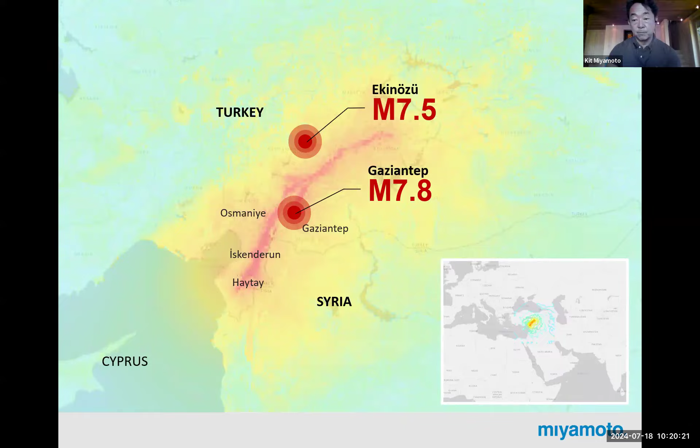If something like magnitude 7.8 and 7.5 happened here, we're going to have some serious consequences. The impact affected almost 14 million people. It's such a wide area and high density, and it killed 51,000 people and injured 100,000 people immediately.

It displaced almost 4 million people, and it's about 3 million people to this day, even after 1 year, affecting almost 10% of the gross domestic product. So it's a huge impact here.

This is probably one of the worst earthquakes I've seen for quite a while, maybe since the Sichuan earthquake. Magnitude matters, especially the 7.8 and 7.5 back to back, 2 hours apart, and early morning - that was a huge impact.

Using NASA JPL data, we assessed about 1.7 million buildings. Most are apartment buildings, usually 3 to 6, 7, 8 story high concrete structures, built maybe 20-30 years ago. It's a fairly modern area, but expanding a lot in the last several years too.

Out of the 1.7 million buildings, about 2%, 35,000 buildings collapsed immediately. And 200,000 buildings, about 10%, were damaged really bad, near collapsing. Almost 500,000 buildings, 28%, received light to moderate damages. So you're looking at about 40% of building stock that was not occupiable.

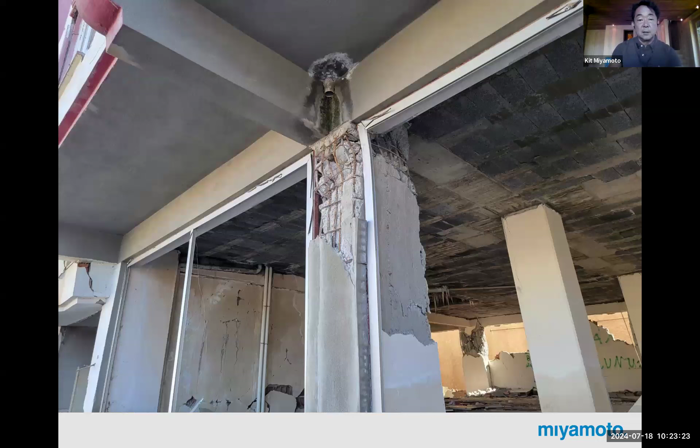Something like this - this is what engineers call the plastic hinge formation. Believe it or not, this is in a textbook. This is how it should work, you know what I mean?

We push the buildings - earthquake pushes the buildings almost to the verge of collapse, but not quite collapsed yet. That's how California building code is set up, and how the world is engineered. This is one of the best case scenarios here, even though it looks bad and dangerous as it is. This building was not repairable, obviously.

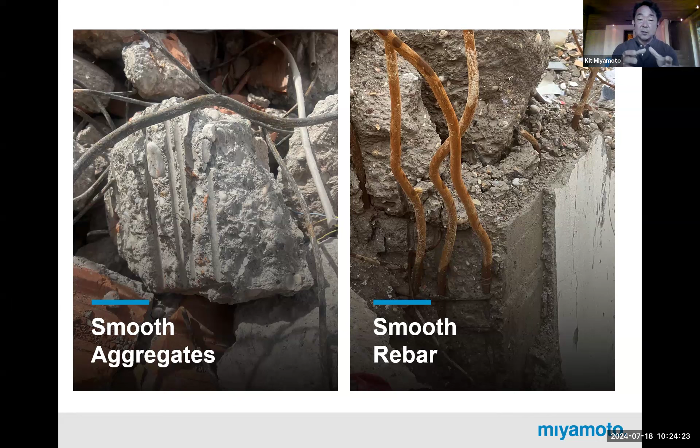But because there is no inspection system set up, there's a lot of irregular construction, such as the aggregate put in concrete being smooth, or smooth rebar, or not enough reinforcement. In earthquake engineering, the little tiny things matter - it's not like missing columns or walls, it's just little variations in fieldwork that make a huge difference, life or death.

Tens of thousands of apartment buildings have actually been reinforced today, which is really good. But we still have a ton of older concrete structures which haven't been addressed at all.

So Turkey obviously has had a huge impact, but at the same time there are success stories. For example, in Turkey, any hospital with new construction over 100 beds has to have base isolation.

What does base isolation mean? A building essentially sits on the ground - if the ground moves, buildings basically move with it, and that causes the damage. Base isolation provides a gap using what we call rubber isolators, or it could be air, but it's essentially a roller. So if the ground moves, the building stays in the same area.

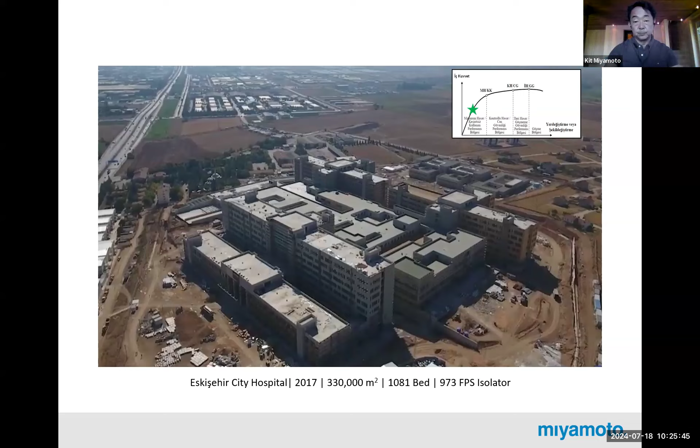That is actually something we should keep in mind, that hospitals need to be functional. Police, fire stations need to be functional. Without base isolation in this case, it's not possible. Because base isolation not only protects the building itself, but contents, which is actually much more vulnerable, much more important for many cases. So having a base isolation like this is the way to go, and that's how it's proved here.

In this regard, Turkey is much more advanced than we are, because we don't make that kind of functionality requirement part of our code. We imply it, but we don't really enforce it in the sense that the Turkish do.

For damage assessment, OES and our Seismic Safety Commission have been working with NASA JPL for quite a long time for this real-time damage assessment. Essentially, the satellite images show you the before and after picture. You overlay the buildings so you can see the difference in movement, and you assign the damage to it. For example, this city called Hatay had huge damage here, about 40% damage. The dots indicate where the major displacement of a building happened, as that's what damage is. Working with them over the years, this map has become very accurate, and it's a really useful tool.

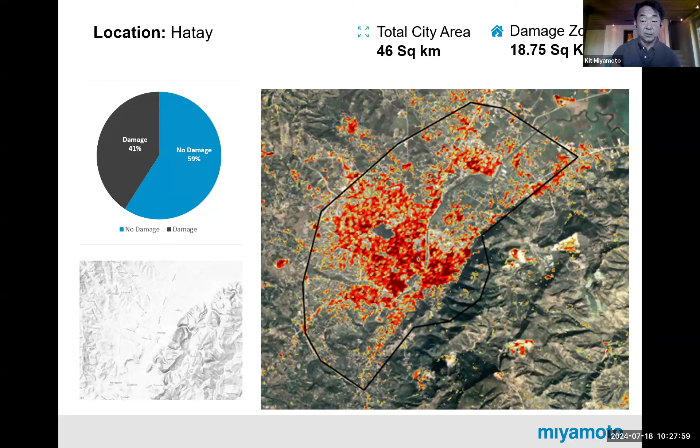So once things happen like that, our team deploys into the area, and we can go to places where we know the damages are. This is an incredible roadmap, and something we definitely need to use in California for future earthquakes, which is available.

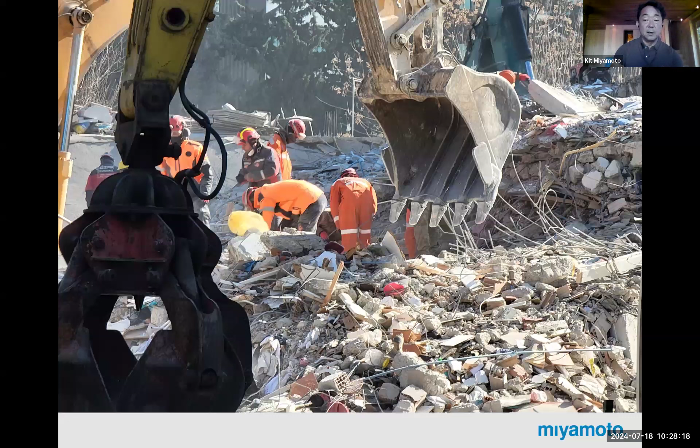Now, one thing the Turkish did right is response and recovery. Their reaction is super fast. I arrived there about 2 days after the earthquake, 48 hours. In every city and village I went, the commercial contractors were activated, by decree from the president, to get contractors to participate in urban search and rescue by removing debris and so on. So that's something you see everywhere.

In every village, every city I went, there were urban search and rescue teams deployed, not only the local Turkish ones, but international teams. There were over 100 teams deployed really fast. I think this is the first case where urban search and rescue teams were able to rescue hundreds of people, scores of them. It has a lot to do with the speed of response, that really matters, and also the quantity of it. There were 100 teams from internationally showing up really quickly. That really matters.

This team is from India, actually. And AFAD is equivalent to FEMA in Turkey.

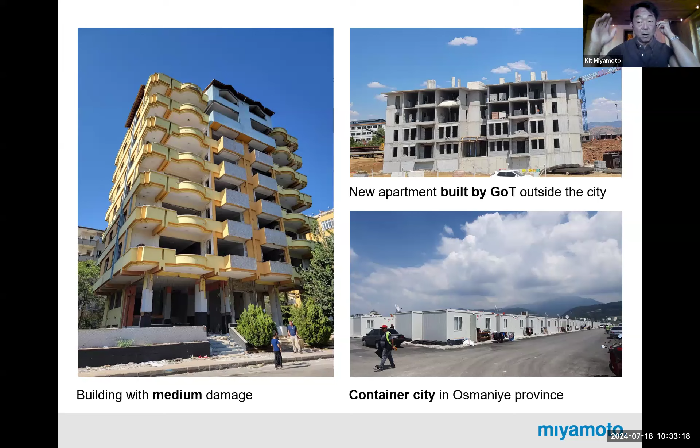So next phase, we're actually looking into moderate buildings to repair. By the way, it's really important to repair and strengthen the damaged buildings. I know the tendency is to want to take it down if there's some damage. The problem is once you take the building down, it's really hard to reconstruct back. That's something we saw in New Zealand.

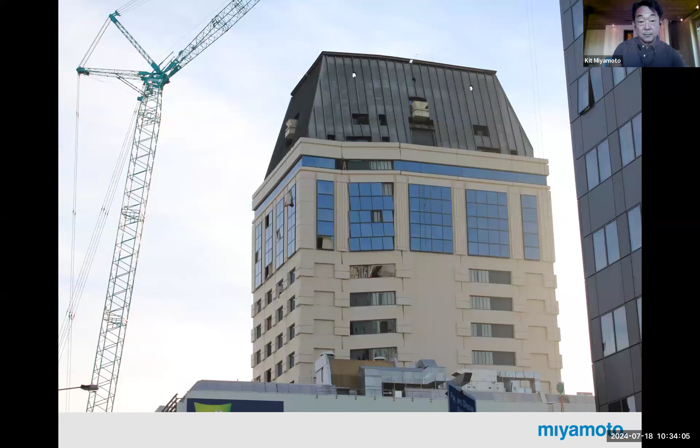Here's what happened - here's a picture. This is one of a high-rise buildings, a modern construction built in 1995. But you see a little kink on the left side. What happened is three columns just ruptured or failed at the 11th level. No one died - it provided life safety performance, we call it, just like we do in California. Everyone was able to evacuate. But once this happened, you cannot repair this kind of building. So it's a total loss. This is exactly what we're going to face in California.

Just no doubt about it in my mind. This is the first time you see modern construction, a modern city similar to California, went through that fairly moderate earthquake and had this result.

So what does resiliency mean anyway? Let's take a look, because we're looking at resiliency, right? So time is the horizontal axis, and a social indicator, such as in the New Zealand case, is the number of building types. Some earthquake happens, we lost 1,800 buildings, right? What we call direct loss. There's a downtime, which is the search and rescue or damage assessment phase - that's a downtime because there's no recovering effort happening.

Then the reconstruction side happens - the recovery component. So if the bucket is smaller, then that resilience is higher. So how do you do that? There are two ways to do it.

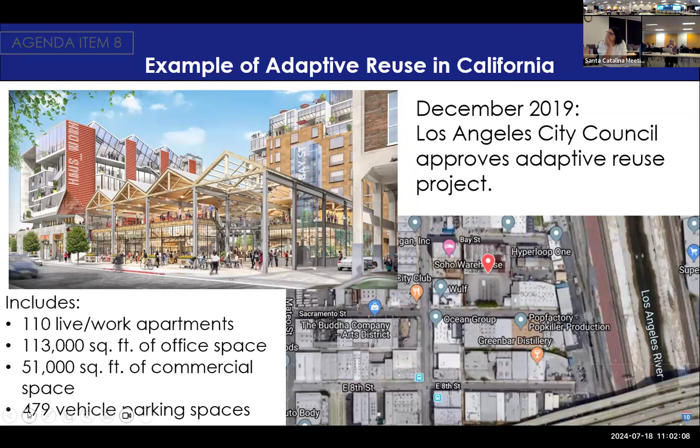Here's an example of an adaptive reuse in California. This one was done in 2019 and approved by LA's City Council. As you can see there, it will include some live/work apartments, as well as office space and commercial space and parking.

Next slide, please. The Mills Act was passed in 1972. It allows participating cities and counties to provide property tax relief for qualified historic properties. Local governments have to elect to participate in the program, but it provides homeowners or building owners a 40 to 60% annual tax savings for newly improved or purchased buildings. Those buildings have to be rehabilitated with seismic safety in mind, as well as affordable housing and promotion for them.

There are 2 bills in process right now looking to slightly amend the Mills Act, both assembly bills. One is AB 2909. It expands the offering of financial incentives to property owners for commercial buildings greater than 30 years old, and funds must be reinvested in retrofitting and repurposing existing buildings for new residential rental units. It's currently in the first chamber, and if passed, it would go until 2036.

Assembly Bill 2910 would allow LA to adopt alternative building regulations for converting commercial buildings and structures to residential use. They will need to work with the California Building Standards Commission and other state entities. It is also in the first chamber. If this bill is passed, it will go until 2029, or until a statewide adaptive reuse building standard is put in place.

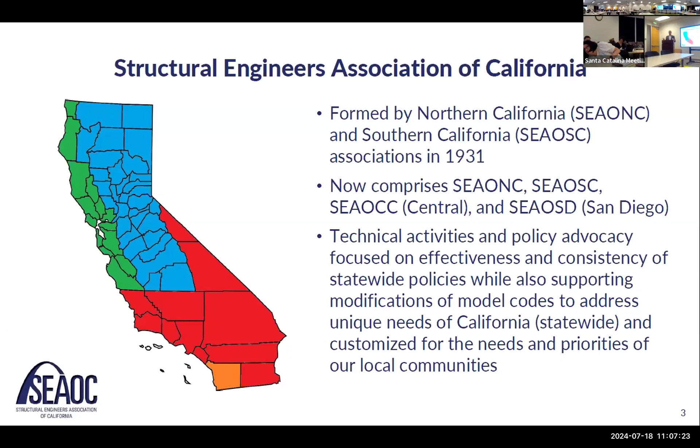Next slide, please. Like I said, we have been around for a while, almost coming up on our 100-year anniversary. We formed from both our Northern and Southern California regional associations originally, and then we expanded at the state level, adding our Central California and San Diego chapters as well. While we are a statewide organization, we also focus with Don Shinsky here in California's Capitol on policy actions at the Senate, the Assembly, the governor, and all of our state agencies. We also have strong local participation. City of LA and City of San Francisco have strong engagement from our local regions to help with local ordinances that supplement the things we're doing at the state level.

Andy, thanks for the intro. I had this here just in case. We do talk about adaptive reuse and some of the basics, but I want to make sure people understand adaptive reuse in terms of the building code context is already covered by the building codes. The existing building code talks about conversions, alterations, or changes of occupancy. So there are provisions in the California existing building code that would cover what we might consider today, adaptive reuse, more specifically, say commercial office to residential. We'll talk a little bit about the effectiveness of the California existing code provisions as it comes to existing building safety. Next slide, please.

So just as a reminder, you've heard me before present to you on things looking forward about what our codes could be doing. Kit was talking about things. You've all heard about functional recovery and how we could be doing new buildings better.

Any new building code initiatives, just to remind you, don't apply retroactively to existing buildings. That's probably well known amongst this group. But I just want to make sure we understand existing buildings don't necessarily trigger updates or upgrades unless certain things are changed within them. So in terms of the current code language, there are certain thresholds that must be exceeded before an existing building has to become compliant with some sort of new code requirement.

So those things you see here: changes in design load or altering a member capacity. Sometimes if there's a substantial amount of work being done throughout the building, but it's often a large percentage of the building being affected. And then also if for some reason a new configuration changes what we call irregularities, it changes the performance because it's not as regular anymore.

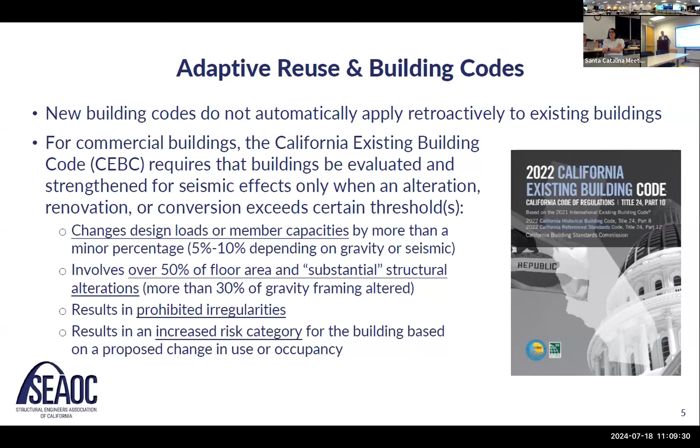Most buildings, and I'll talk about mostly commercial, regular occupancy type buildings, most buildings undergoing renovations or alterations don't usually exceed those thresholds that are in the current building code. That's why you see a lot of local ordinances looking at ways to be more proactive about how do we address performance of existing buildings, how do we get them to be more compliant with current thinking and current codes.

And so in particular for adaptive reuse, when you're thinking about commercial or residential risk category, we're not changing the risk category. Commercial buildings and residential buildings are the same risk category when we're talking about building codes. So that is not one of the thresholds that's going to be triggered to mandate some sort of change or upgrade in the seismic safety of the building.

And quite frankly, it's human nature that many people just naturally try to avoid the other thresholds, that they will plan around them to say, we'll just work in a quarter of the building so we don't exceed that 50% trigger, or we'll make sure that we're not cutting holes in critical walls, but we'll go do a lot of other work to other walls. So it's human nature that a lot of these thresholds don't require conversions at the existing buildings we see today to come up to speed or up to date with current codes.

So I will give credit to many forward-thinking state agencies, DSA, HCAI-OSHPD, the state of California for state-owned buildings, including UC and CSUs, the Judicial Council. There have been a lot of forward-thinking agencies at the state level thinking, hey, we need to be more proactive about that. So they'll look at the risk about their whole portfolio of buildings that they own, and they'll think about a plan and a program to bring those buildings more up to date, or to look at the most critical buildings and make sure they're performing well.

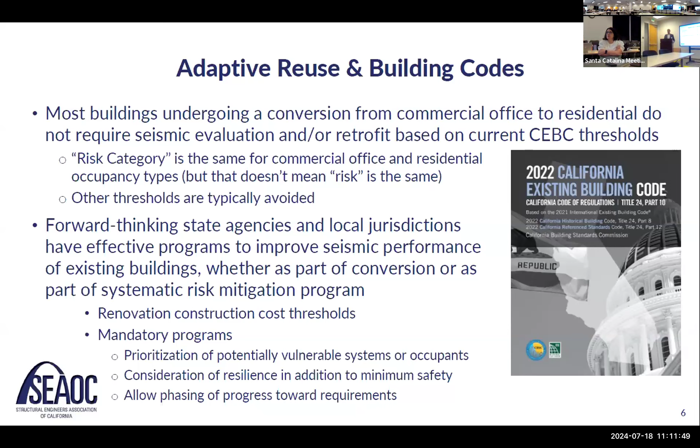So a little bit about risk category. You heard me talk about risk category for regular commercial office and residential - in the building code it's called risk category 2. Things like fire stations and hospitals are risk category 4.

If you're going from category 2 to 4, you're going to trigger an upgrade in your existing building. If you're going from 2 to 2, from office to residential, you're not going to trigger a change in risk category under the building code definition, so you're not being mandated to change anything or become more compliant with current codes.

I want to reiterate, risk category in the building code context is generally providing similar protection in terms of prevention of collapse or probability of collapse. It maintains a certain probability of collapse, but that's not the same as what we'd consider exposure - risk exposure in terms of the actual negative impact or chance of negative impact to occupants of a building. We'll talk about that on the next slide.

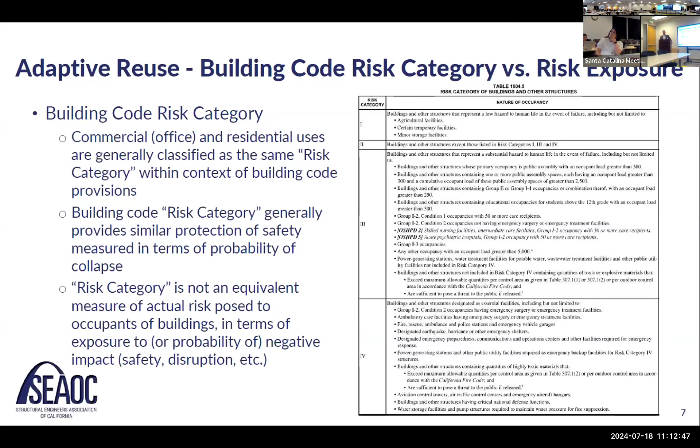Next slide, sorry - I was trying to transition smoothly.

So for risk exposure, FEMA has done a lot of work thinking about building occupancy models or building population models - how long you're in a building, and as an occupant, how much risk you're at based on the building you're in. While a given building might have the same probability of collapse, you're going to be in different types of buildings more often than others.

When you're thinking about converting from an office building that you're in roughly 8 to 5, Monday through Friday, to a residential building that you're in maybe 12 to 14 hours of the rest of the day plus all day on weekends, you're changing your risk exposure because you and the people in the building are going to be there more often.

So it increases the chance of an earthquake happening while they're in the building. The FEMA studies have studied the population and how people move in and out of buildings over time, throughout the day and week. When you think about risk exposure to occupants, there's a threefold increase in risk exposure for someone in a residential building compared to someone in an office building.

So think about a high-rise office building in LA that might be converted to residential - that's actually an increase in risk exposure because people are going to be in that building more often, but the building code doesn't trigger that because it's not a change in risk category. I want to make sure we're not just falling into this building code context of 'no change in risk category' when it is a change in risk exposure.

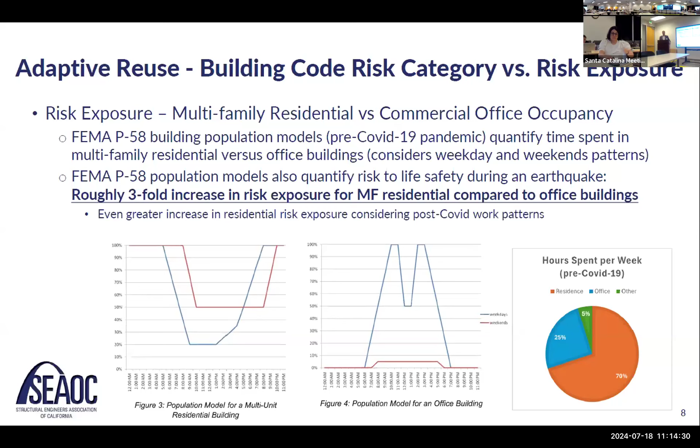Just the highlights - Andy started to mention some of these, so I'll highlight what City of LA and City of San Francisco are currently doing in addition to the regular building code provisions. The City of LA has provisions in place right now in their existing building code that says all existing buildings, if changing from commercial to residential, shall be analyzed for what we call 75% of current seismic design forces.

So there's no loopholes there - they're saying all of them shall be analyzed. Our Southern California section, SEAOSC, is working with the City of LA Department of Building Safety to figure out how to take that requirement and implement it effectively, making sure people are thinking about whether that's too large of a step, or too much to ask.

At the same point, we're trying to communicate that we're only asking it to come up to 75% - it's not even mandating that it come up to current code. There's already been a reduction in stringency from current codes by allowing this 75% of new code as its design standard.

City of San Francisco has something similar. They have a threshold added to their code that says if you're doing non-structural alterations to a building - avoiding touching the primary structural system like beams and walls, but touching more cosmetic things like ceilings and partitions - if you're working on two-thirds or more of the number of stories, then you need to evaluate it again to a reduced seismic hazard, but maintaining life safety performance under that reduced hazard.

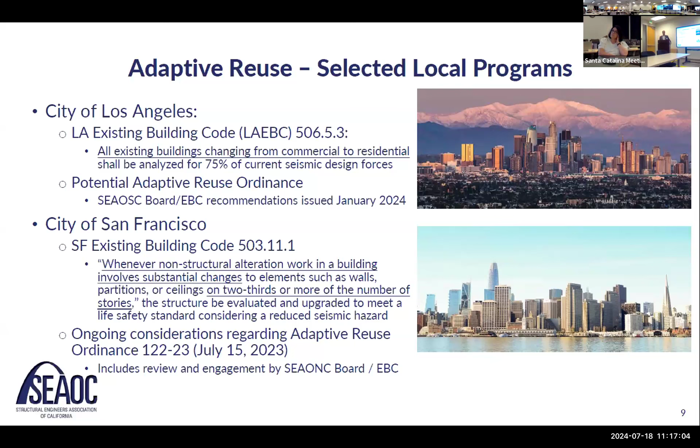So again, based on what we've been doing at the local level, we at the state level have now come up with a policy that we believe in as an organization, that we recognize the importance of housing, the importance of reuse of existing buildings. This is a very sustainable practice, but we're also very much focused on the resilience of our communities, not just minimum safety. So we understand that jurisdictions are going to be challenged to think about effective ways and creative ways to repurpose their office buildings into housing buildings.

We would caution and encourage people to make sure that when you're thinking about that at a local level from an ordinance perspective, we don't want to minimize the quality of the review process. There's definitely things we can do to expedite the review process, but we can't minimize the quality of the review process.

And we also need to make sure that we're considering to maintain, if not supplement and reinforce, our existing mandatory and voluntary seismic retrofit programs. Those programs at the local level are extremely effective. Just generic building code effectiveness is much less effective. So we applaud the cities that have been proactive about this, and we certainly don't want to undermine the efforts they've had in successfully adopting mandatory programs to improve the building stock and everything else.

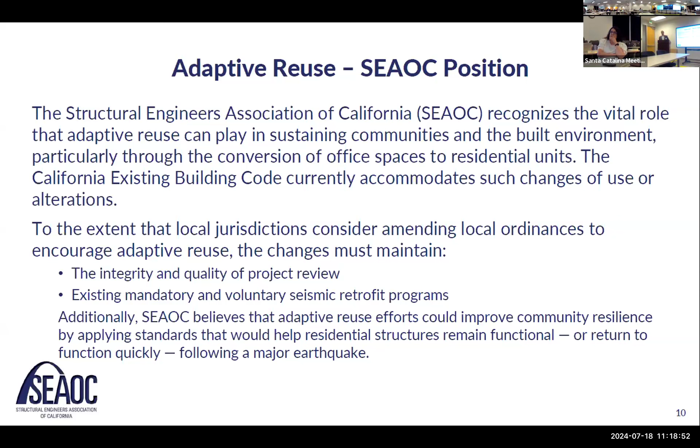And then lastly, as we think about this moving forward, we think the conversation needs to consider the resilience perspective. If you're going to spend money upgrading a building for amenities or changing the space with finishes, this is the best time cost-effectively to think about whether this should be the chance to get better performance out of that building to support your recovery in the long run. Not just focused on initial performance of maintaining minimum safety, which we may not be able to get back into the building after that.

So with that, these are some additional considerations. While we have a very formal policy statement, we also have a lot of talking points and ideas to bring to local jurisdictions, to bring to the commission, so we can talk to each other about strategies and priorities and policies. One of them: we just need to keep talking about it. Kit did a great job of communicating this to all of you.

Our basic building code performance objective is life safety and preventing collapse. That means you can get out of a building safely when an earthquake and after an earthquake hits. That does not mean you're going to be able to get back in your building necessarily. You heard about the red tags, the yellow tags. You heard about the downtime. This is something that we've been talking about more and more over the past five years. You've heard me present it here to the commission as well.

We want to make sure we're not confusing even the good work that the City of LA and City of San Francisco are doing. We don't want to confuse that minimum safety threshold with a promise that you'll be able to get back into your building. And so as communities are thinking about how housing is not just a crisis right now for the immediate term, but how housing is critical for long-term recovery, we want to be able to have those conversations and inform the people making those decisions about those expectations and performance.

Lastly, mandatory programs have really been the most effective. The existing building code requirements right now, people are getting around, no fault of theirs; that's the way the building code is set up. But if you really want to improve the performance of existing buildings, you have to think about mandatory programs. Now, mandatory programs recognize there's a challenge. You can't go do every building all at the same time. So there are effective ways. SEAOC has a list of types of buildings or types of systems that might be more vulnerable than others.

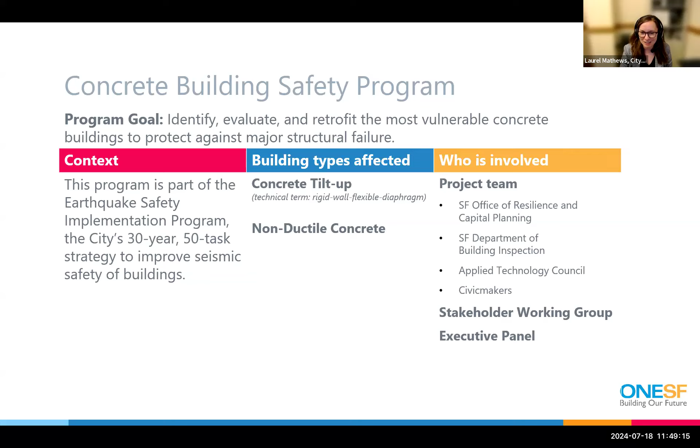Some of the complexities have already been mentioned by other presenters, but this program was part of our earthquake safety implementation program, as Brian mentioned. It's our next big step. There are two types of buildings we're planning to address: concrete rigid wall flexible diaphragm, or tilt-up buildings, and non-ductile concrete buildings. There's been a lot of people involved. I won't go into the details on the project team, but it's been a multidisciplinary effort.

The first type of building we're aiming to address is non-ductile concrete. For this type, imagine a 2 to 10-story office or housing building. It's actually much more diverse than that, but that's the most common archetype in San Francisco. These retrofits are really expensive and complex. There's a lot of issues. Typically when you do these retrofits, people need to move out of the building while the work is done. So there are a lot of challenges here.

The other type of building we're aiming to address are concrete tilt-ups, or concrete rigid wall flexible diaphragm buildings. Think grocery stores, warehouses, auto body shops—basically low-lying, wide industrial type buildings. The retrofit here is a bit more straightforward; you just have to tie the roof to the walls a little better. That's my understanding.

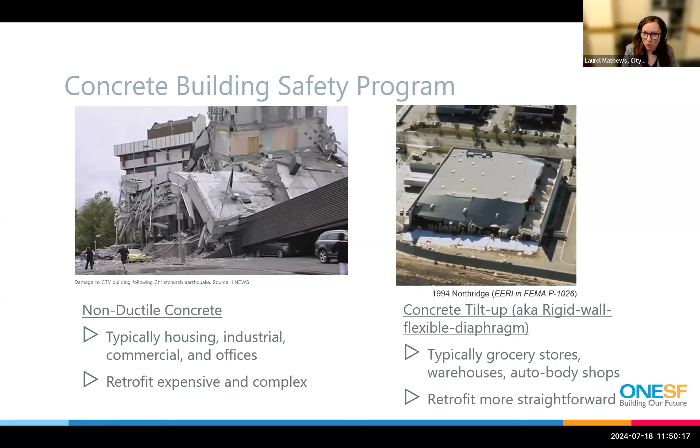As a foundational step for this program, we developed an inventory of possible concrete buildings in San Francisco. Note that this doesn't include tilt-ups, just non-ductile concrete. This was really challenging—a really important step, but also extremely difficult to get a good inventory of which buildings are actually concrete.

I will just share the highlights of what information we can see when we look at this. There's a big concentration, as you can see, in our downtown area.

If you look at the red dots, there's this big concentration of residential buildings in our Tenderloin and Chinatown neighborhoods. Those are both very socioeconomically disadvantaged neighborhoods. There's also a green concentration in our financial district, lots of vacant office space. The opportunity there is you don't have to relocate tenants to get this work done. The challenge is, as multiple people have mentioned, not a lot of rent income coming in for those folks, so the financing is challenging.

I will not go into too much more detail here, but the inventory that we have, while imperfect, has given us some really good broad trends for what types of concrete buildings are in San Francisco.

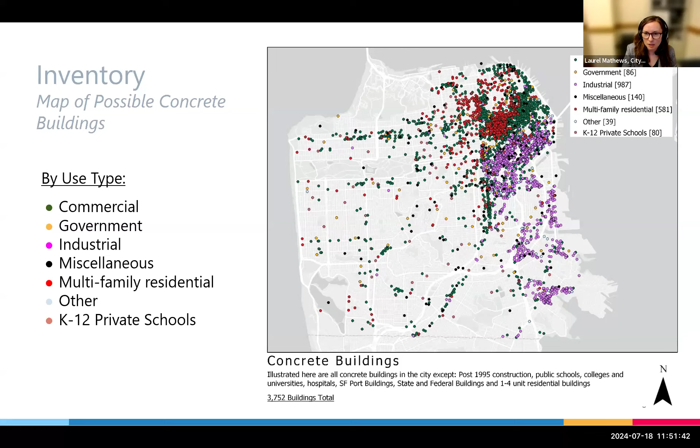I wanted to pause here one more slide and talk about some challenges, because I know inventories are a priority across the state. Lots of different cities are struggling with this or wanting to understand their risk better. So the purpose of our inventory was just to understand general trends in our building stock. We wanted to inform our program design, figure out which buildings need to go first, what are the top issues we need to discuss with our working group. And there have been some challenges.

It's taken years of work and lots of technical expertise to compile this inventory from public sources, but there's still a lot of uncertainty. Concrete buildings are really hard to identify from the street or even from public records.

To actually identify which of these buildings are concrete, a structural engineer needs to review building drawings or do a walkthrough of each one. And the stakes are pretty high for getting this wrong, on both sides. If we cast our net too wide, we risk unnecessarily devaluing buildings that aren't really concrete. If we cast our net too narrowly, people might be living or working in unsafe buildings and not knowing.

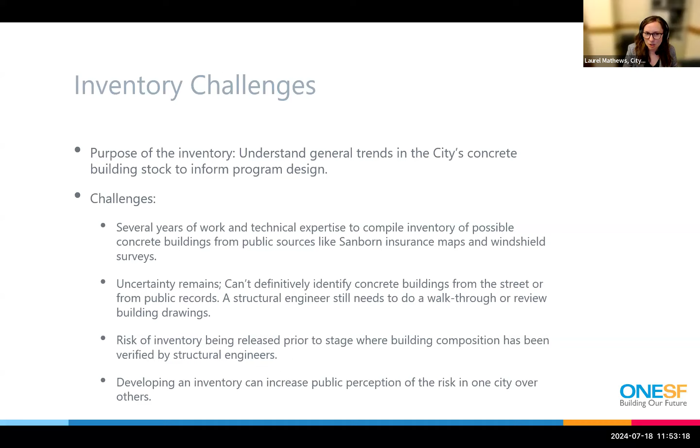It's challenging to do it as one city because you kind of put a target on your back. The public perception is that the risk is worse here versus over in Oakland just because we've done the inventory. We'll talk about how we're going to address that with the next step of this program in a few slides.

In the meantime, because there are a lot of challenges with this program, we have been working over the past year and a half or two years with a working group of internal and external stakeholders. These are representatives of groups who might be impacted by a concrete retrofit program: city and county staff, technical experts, residential building owners, commercial building owners, tenant representatives, Chamber of Commerce. We invited labor representatives and some builders and developers. This working group aimed to represent the concerns of affected stakeholders, providing recommendations for program and policy design. Those are the main two functions we got to.

All this work culminated in a report summarizing stakeholder engagement for this program. The working group developed 9 high consensus recommendations to the city about the development of this program. This report also summarizes the technical recommendations, which was our outcome: how many years, if this were a mandatory program, people should have to retrofit; which buildings should have to retrofit first; what level of retrofit is appropriate. Those kinds of technical questions were wrestled with and summarized in this report as well.

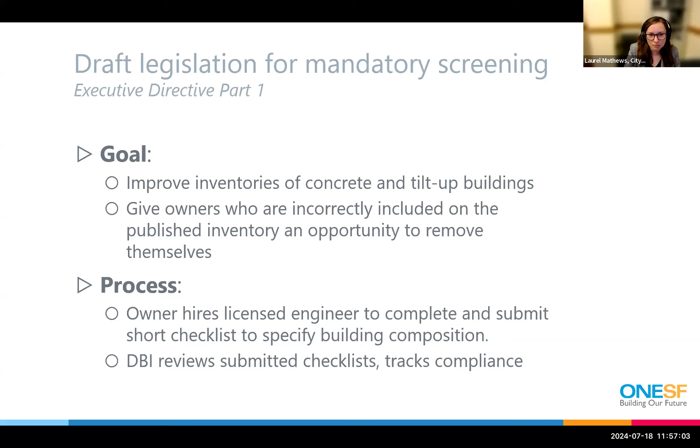The process here would be that an owner would hire an engineer to complete and submit a checklist, which specifies the building composition and some basic information. We're thinking half a day, a couple hours of work to a maximum of one day of work for an engineer. Then DBI would review these submitted checklists and track compliance with the program.

The second part of the executive directive is to publish an appendix in the building code with the technical retrofit criteria that we developed with our technical consultant in coordination with the Structural Engineers Association of Northern California, which would provide a pathway to people who complete the screening form and discover, hey, I do have a concrete building and I want to do something about it.

There's no mandatory program in place yet, but I would like to retrofit in a way that is acceptable to the city and might get me out of having to comply with a future mandatory retrofit program. I'm going to pass it back to Brian to talk about some of our takeaways from this process and some issues worth discussing.

Following up on the adaptive reuse discussion, Laurel was mentioning the idea that people could have an idea of what they need to do. So one of the recommendations that came out of the technical group was to think about a way to do your retrofit without having to pull everyone out of the building, which would save some costs. We came up with two different ways to do the retrofit.

The opportunity for these building owners is that they already have an empty building, and they're already going to spend significant amounts of money to add in what the council member from Walnut Creek mentioned, all the plumbing and those different things. Why not do the retrofit then? That's the opportunity, and we wanted to encourage these building owners in our meetings with them.

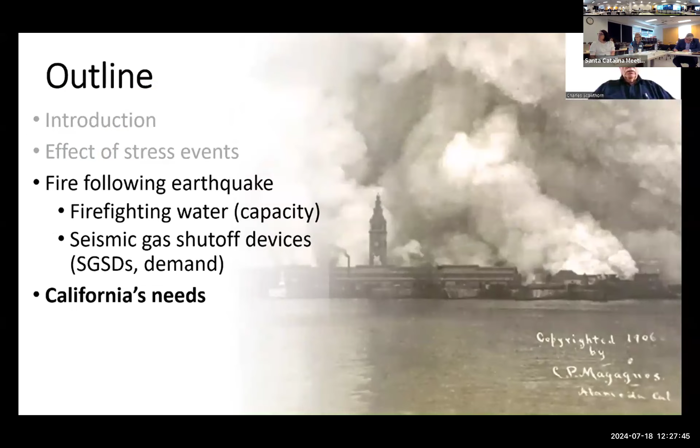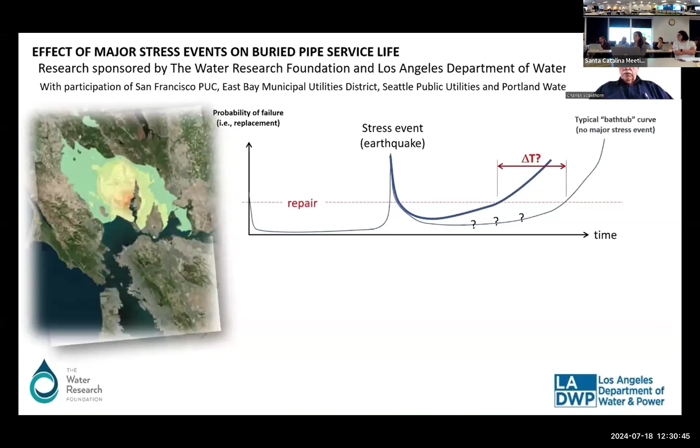However, that assumption has never been examined until this research. The question is: has the pipe experienced a higher probability of failure due to the earthquake for many years afterwards? In other words, has the earthquake aged the pipe sooner than it should have? So what is that delta T for the probability of failure, the point at which it exceeds the threshold and the pipe would be replaced? If that delta T is many years, then the pipe has prematurely aged many years due to the earthquake. But this has never been examined or even actually thought of before.

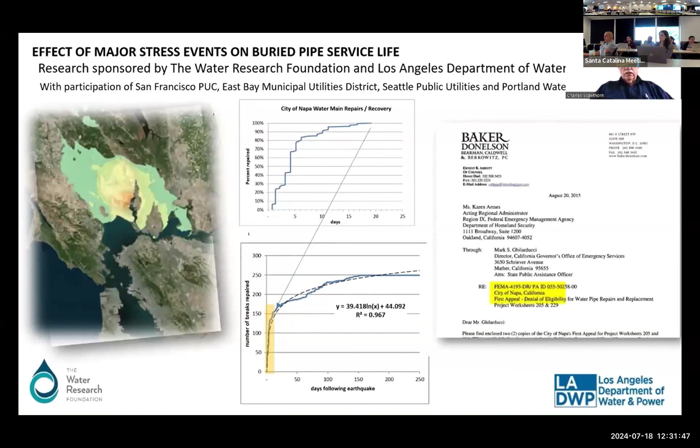They appealed it, and I was brought in. I did an analysis that showed this was due to the earthquake. They were still denied. As a result, I became interested in this question, went to Los Angeles Department of Water and Power and the Water Research Foundation, and was able to collect data from five major utilities in the Western United States. Los Angeles Department of Water and Power provided much of the data and sponsored the research, but San Francisco, Seattle, Portland, and the East Bay Municipal Utilities District supplemented this with roughly an equal amount of data. Keep in mind that LADWP is the largest water utility in the United States.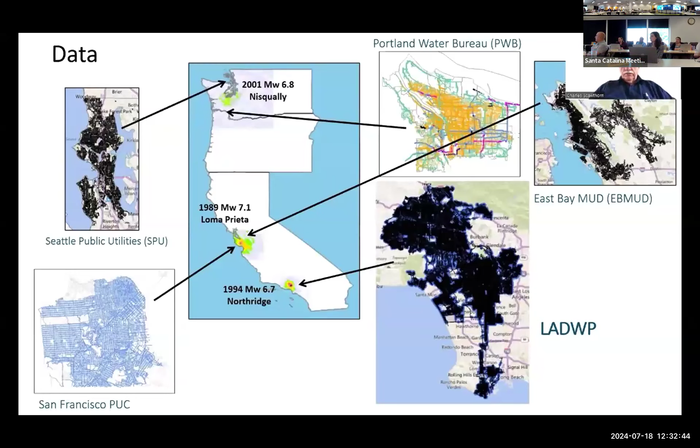Some of these utilities and their systems had been affected previously by earthquakes. LADWP by the 1994 Northridge earthquake, East Bay Mud in San Francisco by the Loma Prieta earthquake. Seattle could be argued that Nisqually, although a very minor earthquake, affected them. Portland has not been affected by any earthquakes. I won't go through all the research.

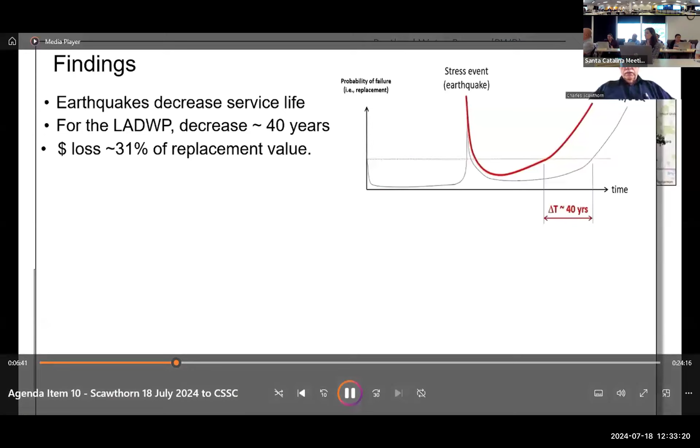The findings were that earthquakes definitely decrease service life. For Los Angeles Department of Water and Power, this decrease is on the order of 40 years. In other words, the Northridge earthquake in the strongly shaken areas has resulted in those pipes having to be replaced about 40 years earlier than if the earthquake had not occurred. This dollar loss, when you think of present values and the amortized cost of the pipe, represents 31% of the entire replacement value of the pipe strongly affected by the Northridge earthquake. It's many billions of dollars.

Implications are that total costs of repair are underestimated by water agencies and by FEMA. Why? Both only quantify costs for the brief post-earthquake emergency period. The significantly larger disaster aid funding is justified, recognizing that system life is shortened by the stress event, the earthquake.

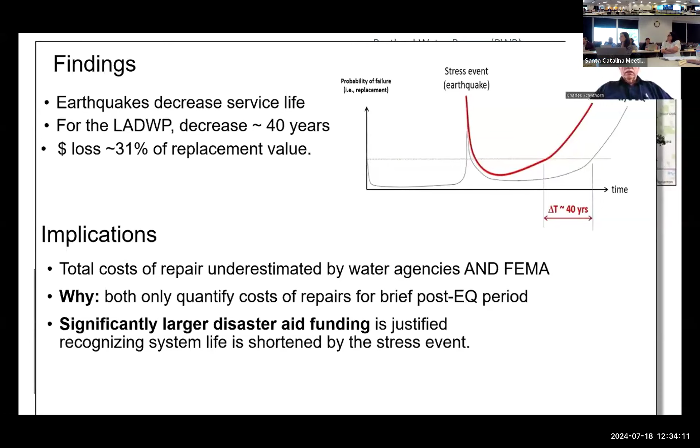This is something I call to your attention because I believe, and I will summarize at the end, that the commission is in a unique position to bring together the water agencies in California to recognize this problem and develop policies so that in the event of a future major California earthquake, these water agencies are properly reimbursed for their real losses. Let me move on.

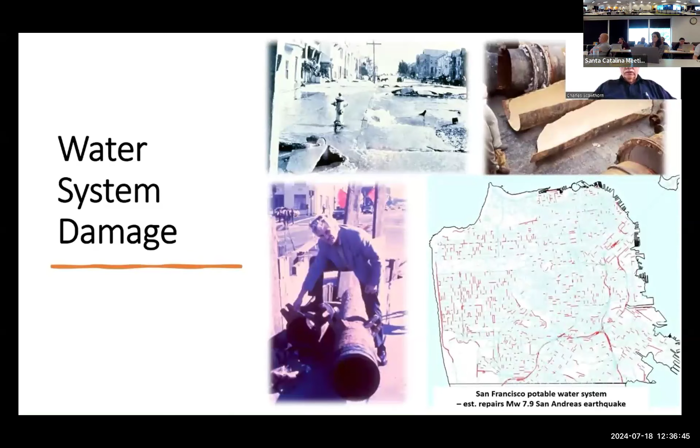The water system damage here, you can see it: 1906 was a factor, 1989 Loma Prieta, there I am with one of the broken pipes, and the Kobe earthquake. Projected into the future, each of these red lines represents a broken section of pipe estimated to occur in a large San Andreas earthquake, effectively a repeat of 1906, in San Francisco's potable water distribution system. This large number of breaks will basically drag down the entire system, and there will be dry hydrants almost entirely throughout San Francisco, which means firefighters will not have the water to fight the fires.

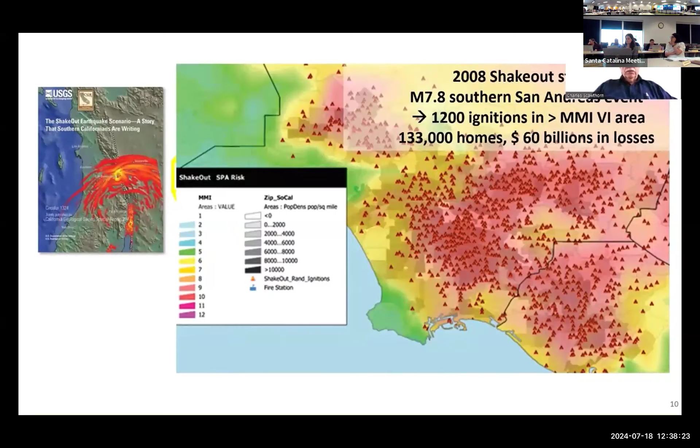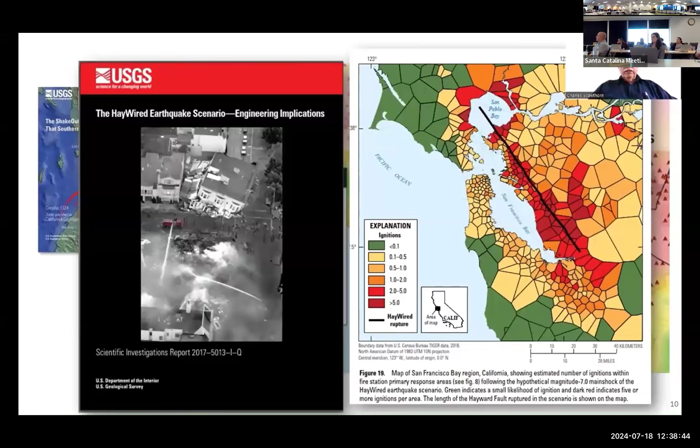I've also looked at it for the Hayward event in the East Bay of San Francisco. This is a rupture of the Hayward fault, and this shows where ignitions will occur—the darker the red, the more ignitions. Each of these polygons represents the response area for one fire station, one fire engine. This is where water will be lost, where red means there'll be basically no water capacity for firefighters, and that coincides with the heavily shaken area. The losses are shown here, again on the order of many tens of billions of dollars.

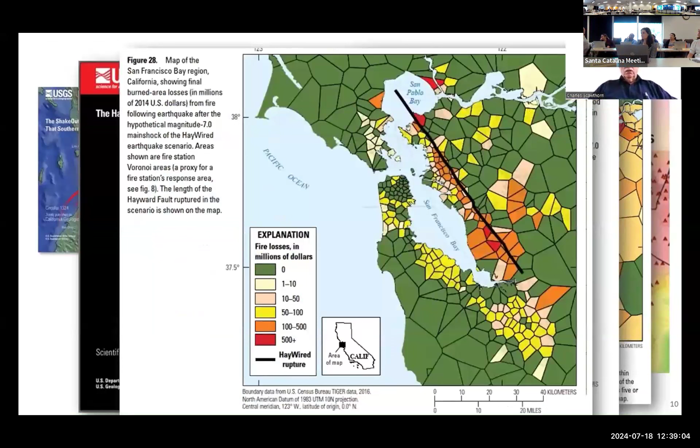It's all documented in a USGS report.

As a result of this, I organized a workshop for all the fire departments in the Bay Area at the University of California's Richmond Field Station. The special equipment that San Francisco, Berkeley, and Vallejo fire departments have, so-called portable water supply systems, were demonstrated for all these departments. We wanted to bring this situation to their attention. This is the only time all of these departments have ever exercised together.

So the commission sponsored, about that time, a study I was able to perform on water supply in regard to fire following earthquake. The findings were that water and fire agencies see earthquakes as a very important issue, but they mostly give it lip service. They recognize they could be better informed about earthquake risk. The fire departments and water departments, in many cases, don't really understand the impacts on their buried water distribution system or the number of ignitions they'll have to deal with. The interaction or communication between them is not as good as it could be. There's relatively infrequent communication.

They consider their normal water supplies as seismically unreliable. The water departments know they're going to have many leaks and breaks and may lose their pressure, but they don't tell the fire departments. The fire departments assume they're going to lose their normal water supplies, but don't ask the water departments. The water supply could be improved, but efforts are piecemeal and not coordinated. Often they're reinventing the wheel that other departments have already developed systems for. Moving water from sources like reservoirs, a lake, or the ocean to the fire ground is very difficult, not well thought out by these departments, and not adequately equipped or regularly drilled.

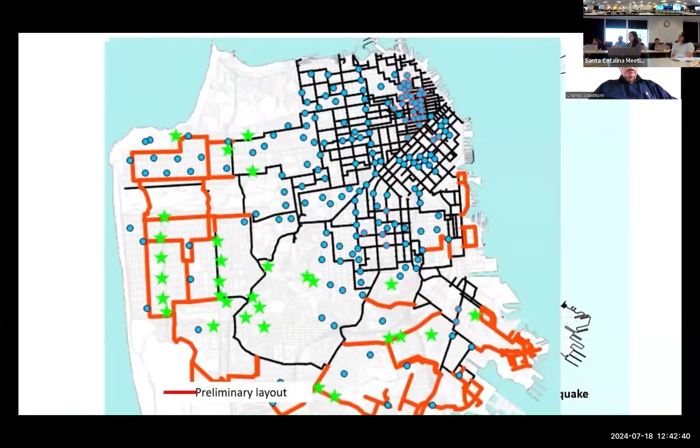I'll explain what they are in a moment. The blue dots are cisterns built decades ago, and the green stars represent cisterns built as a result of recent bond measures, which were based on my analyses. Also now, again using my analyses, the plans for extending the system to the remaining parts of the city are well along, and bond measures have been passed to fund these. So the rest of San Francisco will be protected.

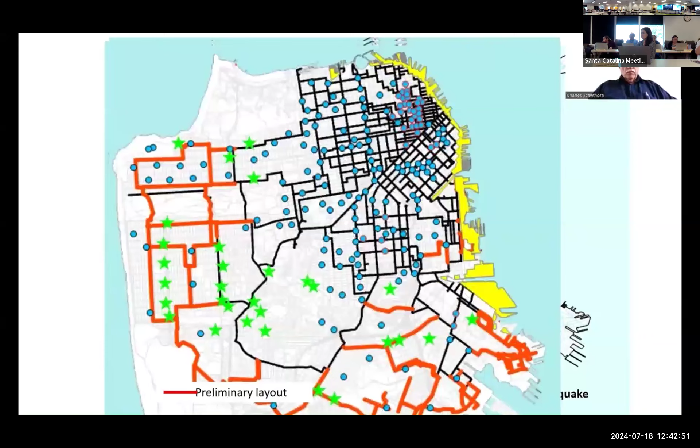The cisterns, by the way, this is what they look like. They're underground tanks containing about 75,000 gallons of water, which is a one hour supply. Above ground, it's simply a circle of bricks on the street to show where they are. San Francisco has about 300 of these cisterns spread throughout the city, a wonderful amount of emergency water supply for fighting fires after earthquakes. Los Angeles, the East Bay, and so on do not have any cisterns like this. Tokyo, for your information, has 14,000 cisterns.

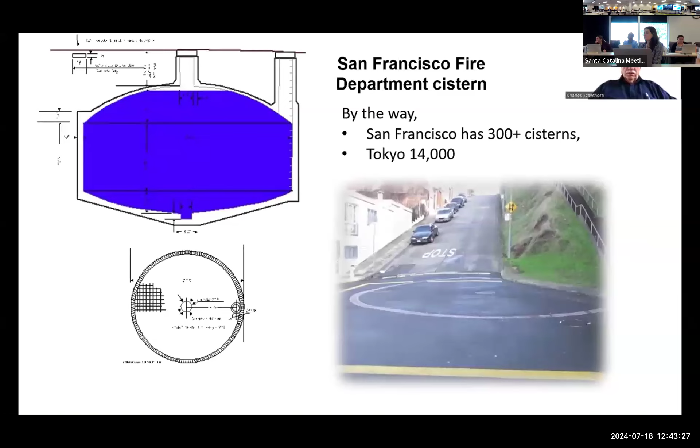But what I would suggest is that there ought to be a statewide fleet of these distributed to various fire departments in seismic areas throughout California. These can be used not only after an earthquake, but also for wildland fires, for example, for dewatering after a flood, and other events like that.

I've also proposed that Los Angeles develop a similar high-pressure saltwater system, with pump stations at the ocean running pipes along the flood channels in LA. The water runs downhill when it rains; you push the water back uphill and use it for fighting fires when the water system in LA fails. But this has not been widely received yet.

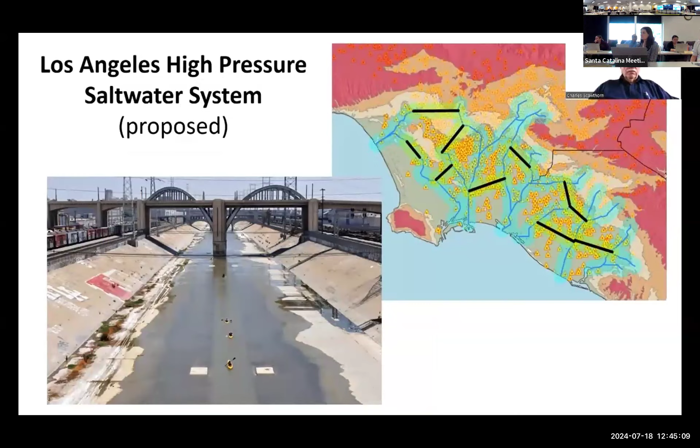Now I'd like to move on to the topic of reducing ignitions, the demand side of the equation. Let me give you this quote from Dickens in David Copperfield: if you have an annual income of 20 pounds and an annual expenditure of 19 pounds 6 shillings, the result is happiness. However, if you have an annual income of 20 pounds and an annual expenditure of 20 pounds 6 shillings, the result is misery. In other words, in that story and in life, as we all know, in our checkbooks or many other situations, the capacity versus the demand is the issue.

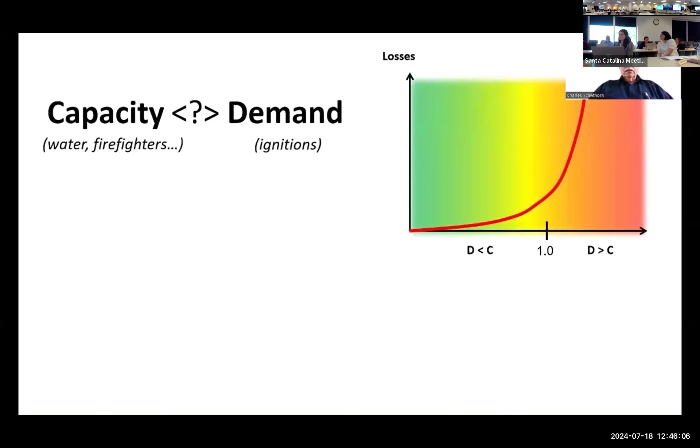If your capacity exceeds the demand, such as water and firefighters resources exceeding ignitions and fire spread, the result is happiness, as shown here. The demand on the left being less than the capacity, the losses are very low in the green area. As the demand starts to exceed the capacity, the losses start to increase exponentially, reaching a tipping point.

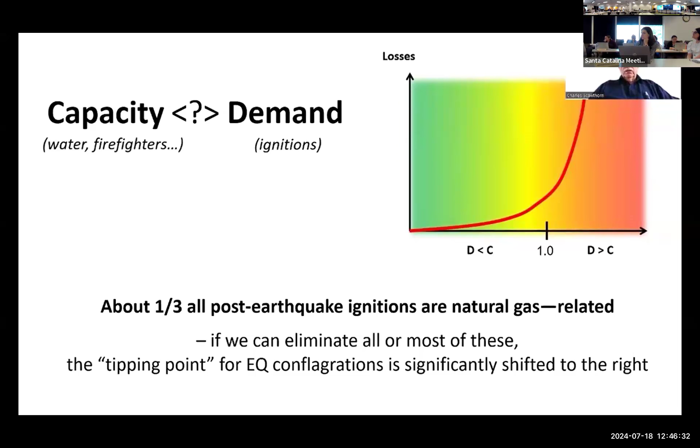In recognition of this, when we recognize that about a third of all post-earthquake ignitions are natural gas related, if we can eliminate all or most of those gas-related ignitions, the tipping point for earthquake conflagrations is significantly shifted to the right, and we're much less likely to suffer major conflagrations.

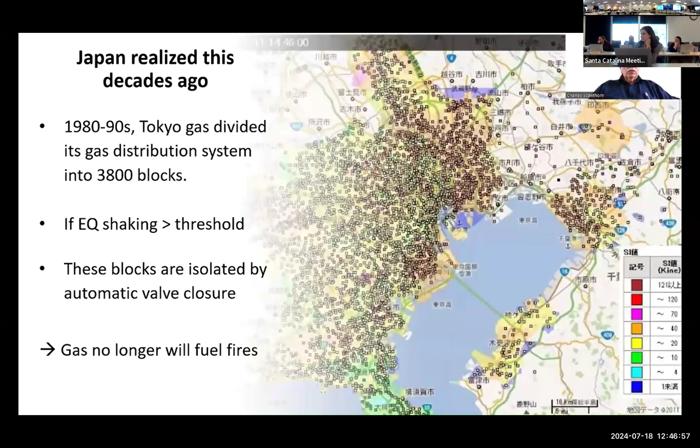Japan recognized this decades ago. In the 1980s and 90s, Tokyo Gas Company divided its gas distribution system into 3,800 different small blocks and installed seismometers at each of those. If the earthquake shaking exceeds a certain threshold, those blocks are isolated by automatic valve closure so gas won't fuel the fires. After the 1995 Kobe earthquake, they also mandated that every gas meter in the country be replaced with new gas meters with a built-in seismic gas shutoff device—simply that small black button.

Actually, it's an internal device, but if there's a false trigger—by a truck going by or something—you can reset the device yourself by simply pressing that small black button on the upper left of the meter. The instructions, as you can see in the photograph on the right, are wired to the meter so that they explain how to reset it.

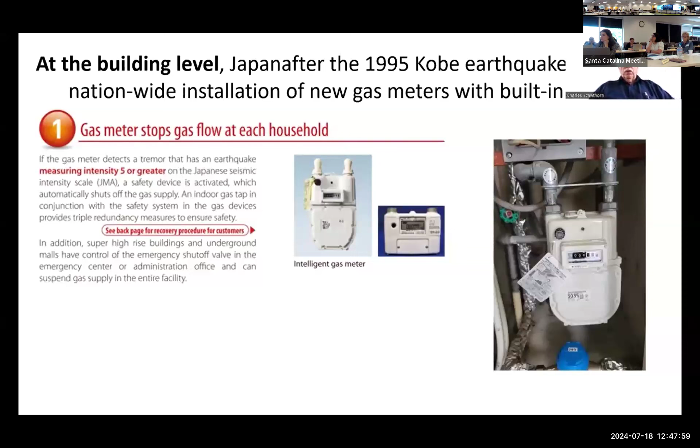I met with Osaka Gas, Tokyo Gas, and the Japan Gas Association to study this whole situation, and they have reported that this is a very successful system. It's been in place for 30 years, they have very few false triggers, and it worked very well in the 2011 Tohoku earthquake, for example. Here are the instructions from Tokyo Gas about how to deal with the situation after an earthquake.

In California, the California Building Code does not require gas shutoff devices of any kind, even for new construction. They leave it up to local ordinance to require such installation—in other words, it's at the local level. For example, these are required for new construction or major renovations in Los Angeles or Berkeley, but not required, for example, in San Francisco or many other jurisdictions.

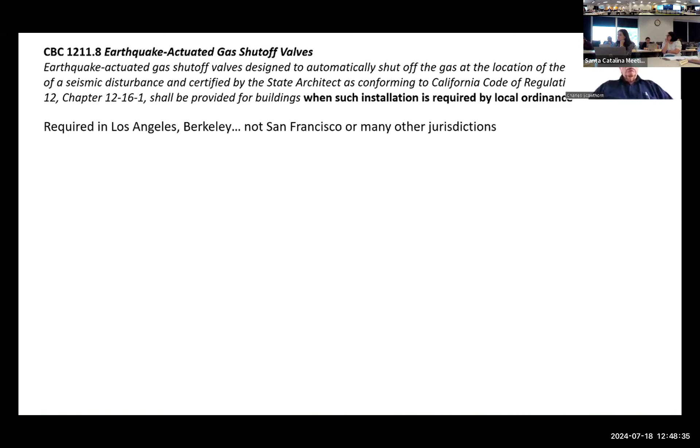As a result, homeowners, either at their option or mandated in LA or Berkeley when doing major reconstruction or new construction, must purchase and install this little red box on the downstream side of the gas meter. You can see it here. This results in sometimes absurd situations—we see here an apartment house with 36 different gas meters, each one with this little red box installed next to it. These devices cost, including labor and materials, about $500 to $1,000 each to install.

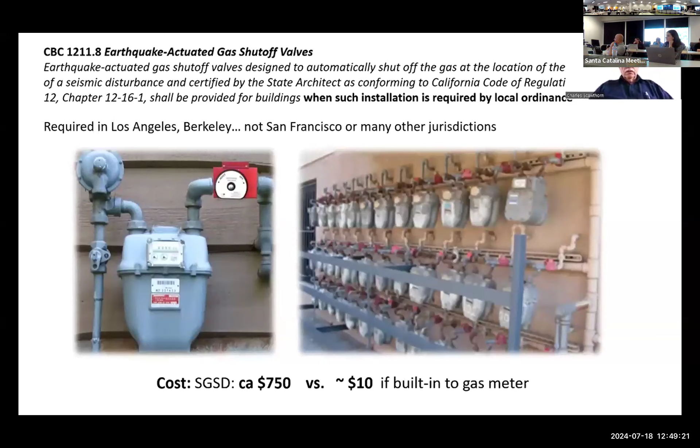Versus if you had it installed in the meter, the cost of having it built into the meter is on the order of $10. So the single apartment house on the right, for example, with 36 meters, has probably spent in excess of $20,000 installing these seismic gas shutoff devices on this bank of meters. Whereas if they'd installed them in the meters, it would have been less than $1,000.

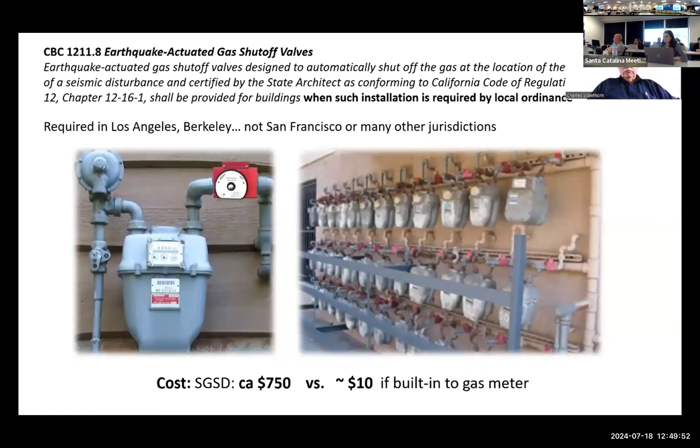When you extrapolate that to all the seismic areas of California, the wasted effort with these red, somewhat clunky boxes is billions of dollars. California's major gas utilities have distribution systems, unlike Tokyo Gas's, that have mostly manual valves, which means someone has to go out to close the valve if there's a leak or a break. We've seen this in the San Bruno transmission line gas leak and explosion, which killed 8 people, and in many other situations in California cities. So they're very slow to isolate the leaks, whereas in Tokyo Gas, they'll be isolated immediately.

The utilities have installed so-called smart meters to eliminate manual meter reading, but they intentionally decided not to include meters with built-in seismic gas shutoff devices. They missed a great opportunity there. So their guidance is very neutral. They have on their website showing you that if you want to, you can go ahead and install one. It's your issue, your problem, your decision. They don't want to have anything to do with it.

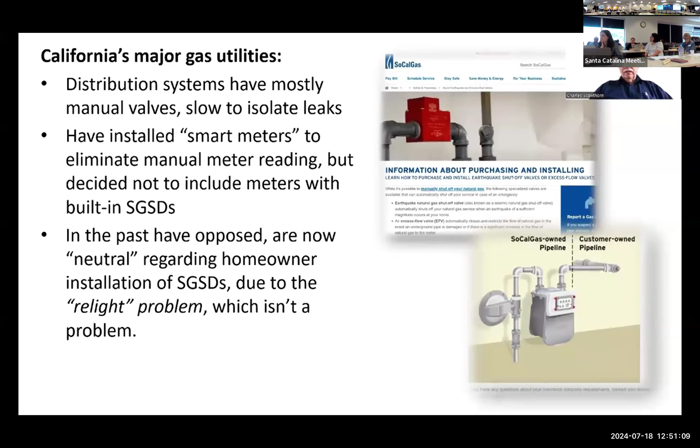And they will often cite the so-called relight problem, that if all gas meters have built-in seismic gas shutoff devices, it will take years to reinstitute gas supply to all the customers, which is a gross exaggeration. The relight is not that big a problem. I can go into more detail on that.

So I believe seismic gas shutoff devices are not needed statewide. They're only needed in areas of high building density and high seismicity. Let me explain. Most earthquake ignitions are like a virus. There are relatively few initial infections or fires. Risk of a house burning down due to the fire in that house is very low.

However, in densely built up areas, few initial fires will spread building to building like a virus contagion. And if you have a seismic gas shutoff device, it won't do you any good if your neighbors also don't have one. Their houses will burn and they will start your house on fire. The seismic gas shutoff device does not prevent spread from another building. Once your building is on fire, the SGSD is irrelevant. All houses in an area need to have seismic gas shutoff devices, just as everyone in a COVID situation needs to wear a mask.

Let me illustrate. There's a bunch of houses. The green represent houses with seismic gas shutoff devices installed. The blue are ordinary houses without seismic shutoff devices. After the earthquake, there are a few ignitions.

The firefighters will be very busy and perhaps won't be able to respond to these fires. And even if they do, they may discover, quite likely they will discover, they don't have water because the water system has gone dry. Therefore, these ignitions will spread first within the houses, and then they will continue to spread and continue to spread until we've got a major urban conflagration, just as we had in 1906 and in other situations.

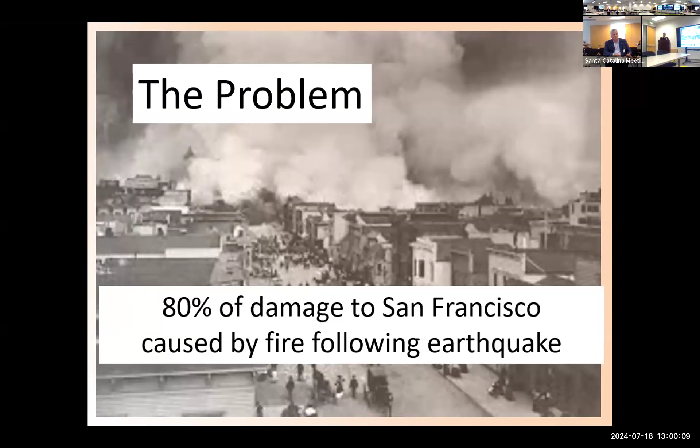I've served in the city for 26 years. Operations Chief oversees fire suppression, airport training, fire prevention investigation. But my previous job was as the bond project manager for the earthquake safety and emergency response bond, so a little familiar with the supply system. The problem obviously is fire following an earthquake, and 80% of the damage is assumed to be the conflagration that's going to come out. I was edified by Commissioner Miyamoto's presentation earlier. The percentages of buildings that collapsed or suffered significant damage, I imagine, will be pretty much the same in the city of San Francisco. The problem has always been fire following.

Scawthorn has done a ton of research on this, and some of his study has led to the continued evolution of our water supply system and the response to fire following earthquakes. So I just wanted to point that out.

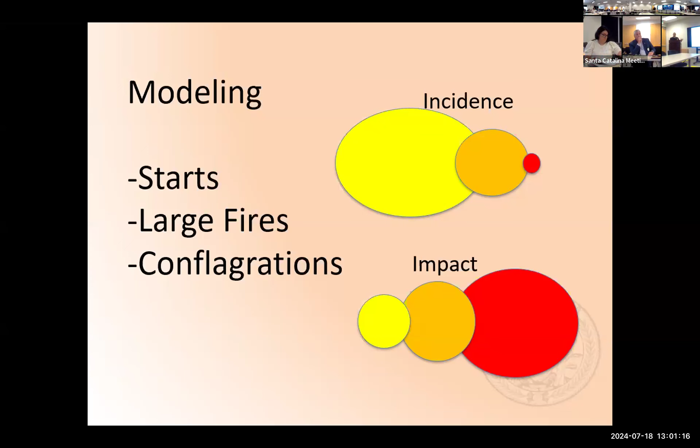Luckily, the San Francisco Fire Department is built entirely for this purpose. The fire department is built on a tradition of conflagration. The city burned three times completely before the fire in 1906. Even anticipating the fire following and the effects of an earthquake in the city, the chief had proposed a water system that was developed after his demise and after that earthquake. And we remained that fire department.

We've evolved. We have a tremendous amount of initiative going forward. We lead the nation in community care medicine and street teams, and we do a ton of things. But at our heart, just like the cute leather helmet we're still wearing, we are built to put out the fire.

So when Dr. Scott showed his beautiful map, I'd like to get a t-shirt of it, colored polygons of the response areas of fire engines in the Bay Area. You could see very large polygons everywhere else, but once you get to the city of San Francisco, they were mashed together because you're sitting on a fire station basically per square mile. That's our population density, but it's also because we're still acknowledging the risk of fire in this city.

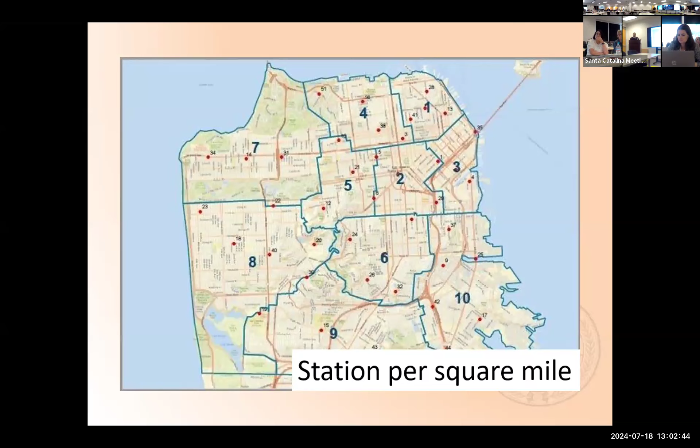We are wood built on wood. We are wood built on hills. We are wood built with wind at our back. So we still maintain a fire station per square mile.

We purchase and maintain equipment that has a higher capacity to fight fire than most cities nationally and regionally. This includes our fire boats, and other equipment I'll get to when I talk about our portable water supply system and our hose tender system. It also includes our staffing, because we can have all the water in the world, but we don't have anybody to apply the water.

So we've been able to maintain, as an insurance policy, resistance to the budgetary demands year over year and the cycle of boom and bust that the state has seen, in order to maintain our staff. And we'd like to expand if we can, but that's where we stand.

Speaking on ignition, the doctor covered it quite adequately. Gas and electric fires are going to be common post-earthquake. We do have some seismic shutoffs in the city, required by code in a lot of occupancies. I won't quibble with it, but we're still going to see significant starts.

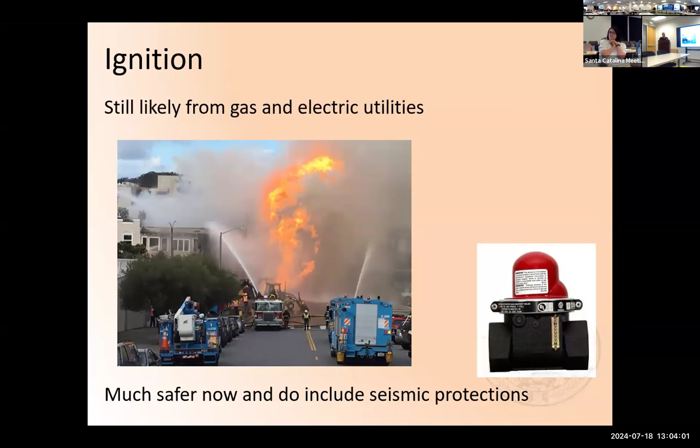And I do think there's an evolving problem here, which I could probably have a study on in the next 10 years. Post-insult to this building, all of these battery storage devices, a significant number of them will likely result in ignition also. This is an emerging problem for us in the city. Just people crashing their scooters leads to scooters catching fire when they charge them. I can't imagine the damage to the structure, or that a significant amount of these structures wouldn't lead to cascading, another emerging fire.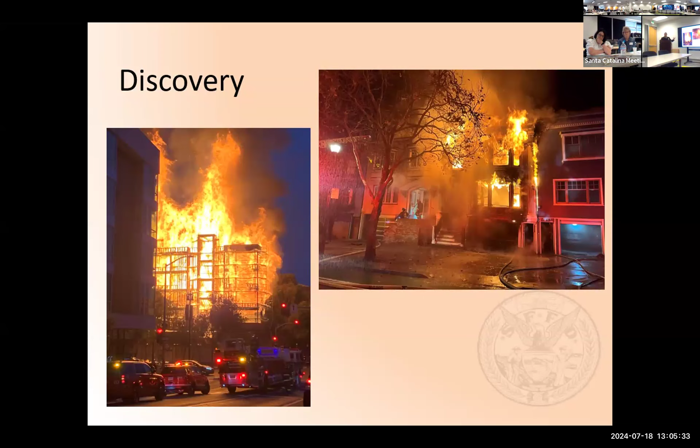So what we've done is we're embracing this and going down the path of doctrine change. There was a period where, as I said, we've expanded our capacity and taken on a number of different roles. Post 9/11, post Katrina, our capacity for urban search and rescue dramatically increased. It's a huge part of the reason I'm standing here, and we embraced it wholly. But we kind of had omitted our primary, which is go find the fire, put the fire out, and then we can do all the other wonderful things for the city of San Francisco to aid the public.

We could leverage technology. There are ways that drone technology and fixed cameras would be an asset to us. That's exploratory. And then, of course, we have a robust neighborhood emergency response team. It's another place where we kind of lead the nation in the development of this program. We will definitely be using these volunteers to go and report any fire starts they can find, greatly increasing the eyes we have on this across the city.

We have abandoned some of our older technologies. The street box system is not functional. Don't let anybody tell you it is. These street boxes sat at most intersections in high density areas of the city, or at most a block away from people's houses. But if they pulled this street box, it was antiquated technology, just a spring that taps out a code transmitted by a copper wire. It was long lasting, but it required maintenance. So there's no more of that. And again, as I said, their ability to assist us in getting the report in.

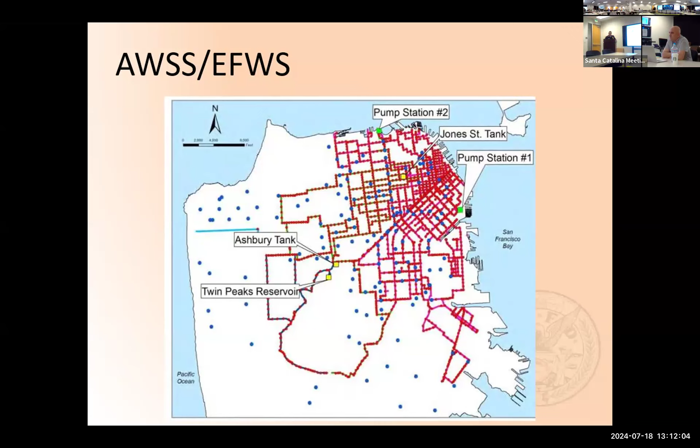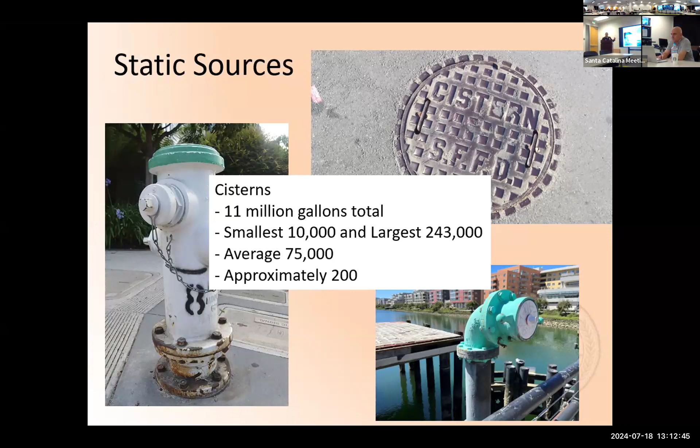Most of our pumpers can pump that dry in about 5 minutes. So if you're talking about extended operations, or trying to find a configuration, cisterns are good, but the cisterns cannot be the answer to the problem.

The high pressure hydrant system itself, supplied by Twin Peaks, has 10.5 million gallons of water and is refillable from the domestic system. But as Dr. Stockman said, our understanding is that domestic water, fresh potable water, will not be the ideal choice for us to buy into. The PUC will be highly resistant to refilling the reservoir for us from Crystal Springs or some of their other water sources. Ashbury tank holds 500,000 gallons, Jones Street holds 750,000 gallons, and is a gravity reservoir.

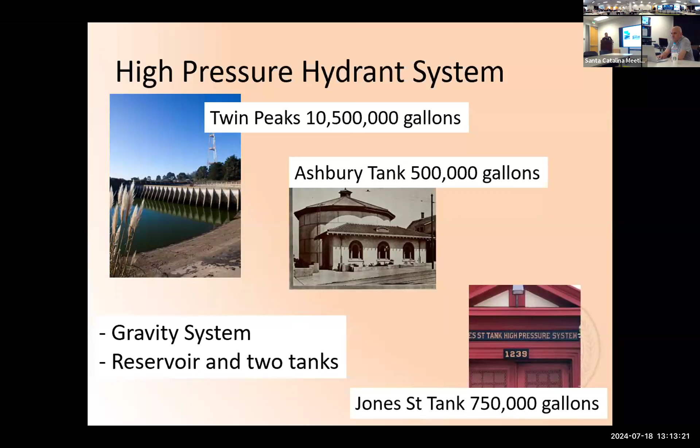These are all high pressure systems, and for fighting fire the most important part would be the capacity, that 10.5 million gallons, or 3/4 million gallons. The reason it is a high pressure system: West Twin Peaks can be 140 PSI, Ashbury tank can be 143 PSI, and the Jones Street tank at the base of the city, with the introduction of Twin Peaks Reservoir, can be 330 PSI of pressure. Why would you need that?

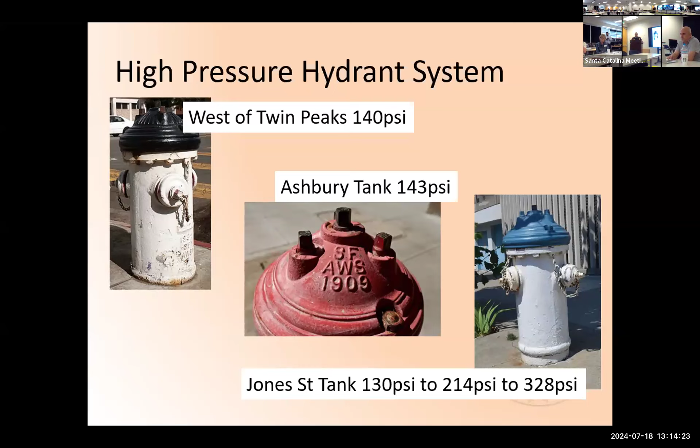The 2 pumps I described are capable of pumping 10,000 gallons per minute at 300 PSI. They are, as in Dr. Stockman's presentation, saltwater systems drawn from the ocean or the bay. It's very difficult and expensive to maintain. We are lucky enough because of our recent bond measures that both of ours are in operation, but it was a heavy and very expensive lift.

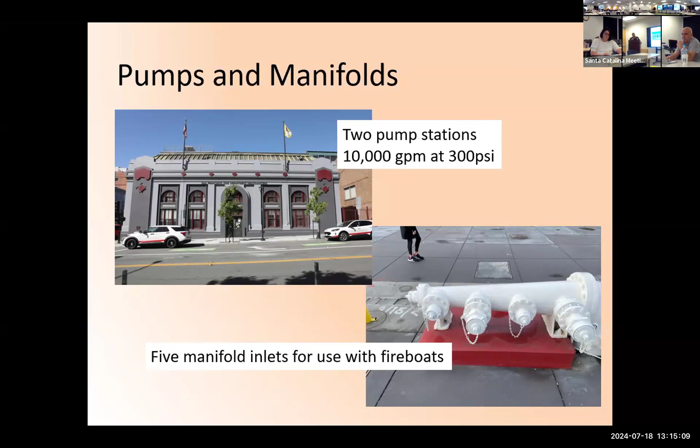We also have manifolds on our shoreline for the use of a fireboat, and they can pump into the EFWS system. They're located all along the waterfront, and maintenance has been an issue with these. But the primary goal with the current manifold would be to wall off a portion of the city, so wherever a conflagration has occurred, we can cut off through valves portions of the city and just use the most proximal manifold with the fireboat to supply water with the great system.

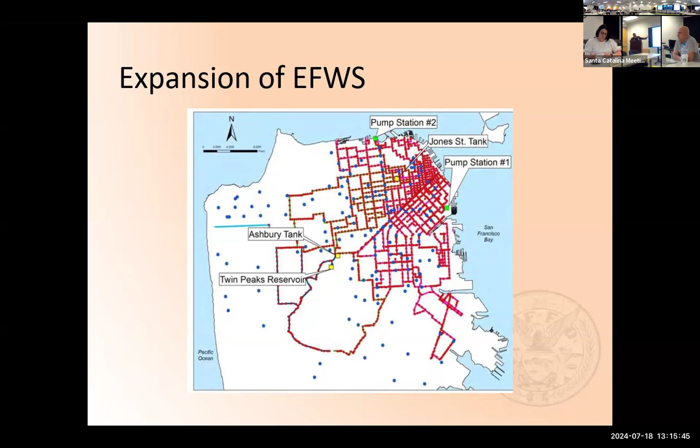This was the map that Dr. Stockman showed with the original system and with the cisterns in place. And then as it's expanded, what the PUC has chosen is to create a system called the PEFWS, literally called the POOFs. So the POOFs is a potable emergency firefighter water system. This is a co-benefit system, so it allowed them to extend capacity for domestic supply to the west side of the town.

However, it makes it less than ideal for the purposes of, well, it will function effectively as an emergency firefighting water system. But there will be a lot of consternation and no joy if we ever have to use it for this purpose. If it requires the introduction of non-potable water to the system, it will be a tremendous burden to clean. But it does extend the capacity to the west side of town.

So we look forward to it being completed. To date, it's only scheduled to be completed in the park, and it will require another bond measure to get it into the Richmond district.

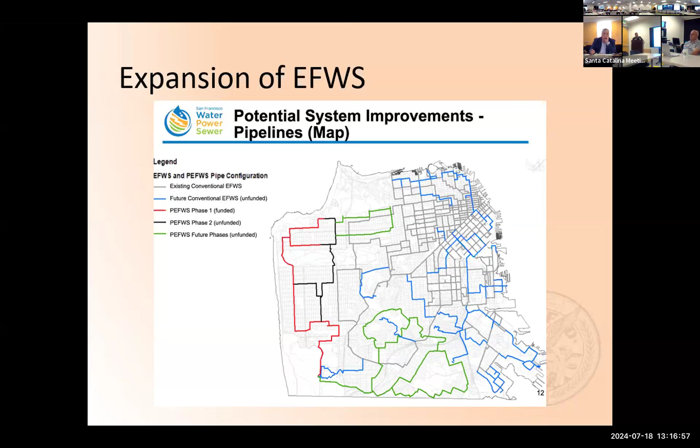So to overcome that, we've long had what we're calling the portable water supply system, PWSS, which we refer to as hose tenders. So there's the legacy hose tenders. This is an example of the apparatus that was being used as a hose tender, or is currently being used as a hose tender, and we're introducing our new hose tenders in a second.

So if there's a loss, like another one of the doctor's maps where it showed every place in the city where the domestic system would go down, to bridge that gap, we'd use what we're doing. You can see you pump from one end, you pump from the other end, you get that redundancy, you get pressure across the system and a fixed system.

And then in general, we would like to use it absent another fire. So we would like to use Gleason valves to power a hose, to power monitors or other firefighting devices, and allow the engines to be somewhere else fighting fire. This is a system that's supposed to be set up again with the Gleason valves so that we can greatly extend our capacity.

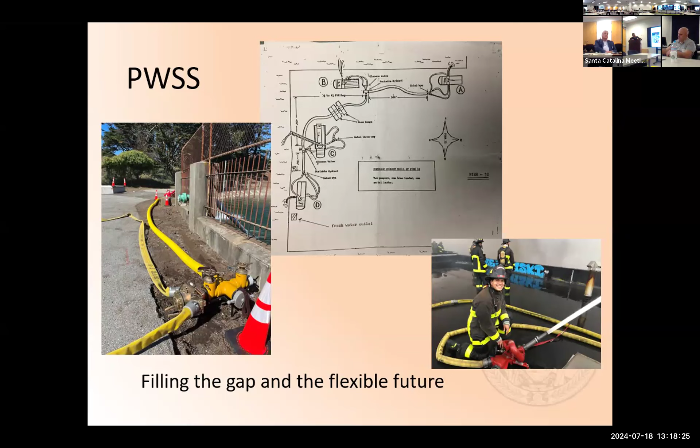So what we've done is entered into a contract with Rosenbauer. They produced 3 of the modern version of our hose tenders. This was the first hose tender. And hose tender 1, it's actually hose tender 18. It's stationed out in the Sunset District. Its main pump can pump 5,600 gallons per minute at 100 PSI. So it's basically half of a fire boat.

It's a land shark. It can cruise around the streets and put out fire like a fire boat. It has 4 8-inch suction hoses, ginormous. A submersible hydraulic pump, which is one of the things we're most excited about, with 3,000 gallons per minute with 100-foot range. So this can go into any static water source in the city and pump 3,000 gallons, which is a tremendous increase.

The suction hoses that Dr. Scawthorn showed, it's 2 8-foot sections. So you're not going to get too many lakes, ponds, swimming pools, reservoirs in the city with this. Yeah, land fire.

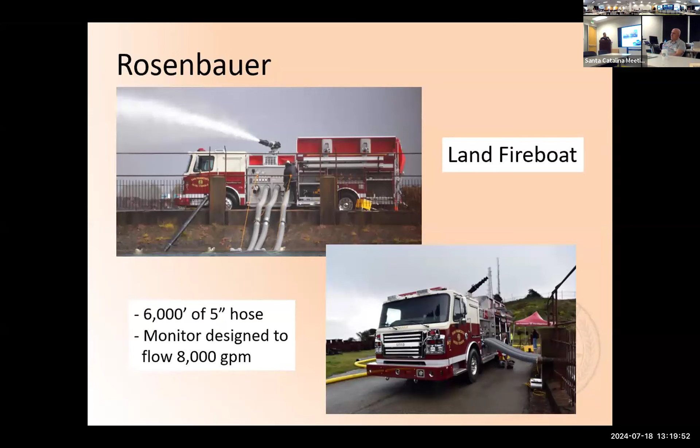What it does for us is if we take the map, these kind of fuchsia dots represent the expansion that one of our hose tenders can give us. That's like a 1-mile circle in the city of San Francisco. If I take that and I can drop those dots anywhere in the city, then I've greatly expanded the reach of our EFWS, or our hose system.

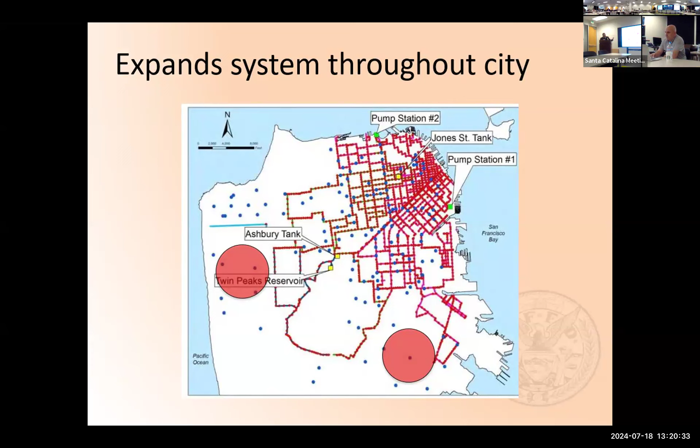Again, 3 are on delivery. I do worry about capacity for purchasing more. We're having trouble maintaining regular fleet, but we will get to it.

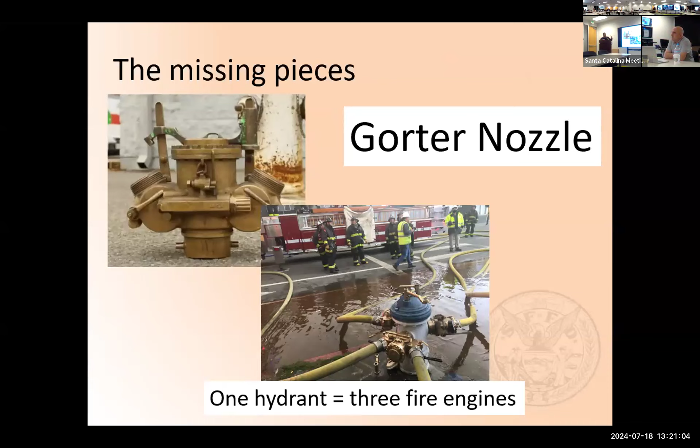And the missing pieces, of course, are Gleason valve support and the Gorter nozzle, the things that took one hydrant and made it breathe fire. The nozzle, again, is another antique piece of brass that went out of fashion about 16 years ago in the agency, but it was the only large diameter nozzle that we have and has not been replaced. That was the capacity to take the Girl Scout troop and tell them to sit on a hose and put out the big fire.